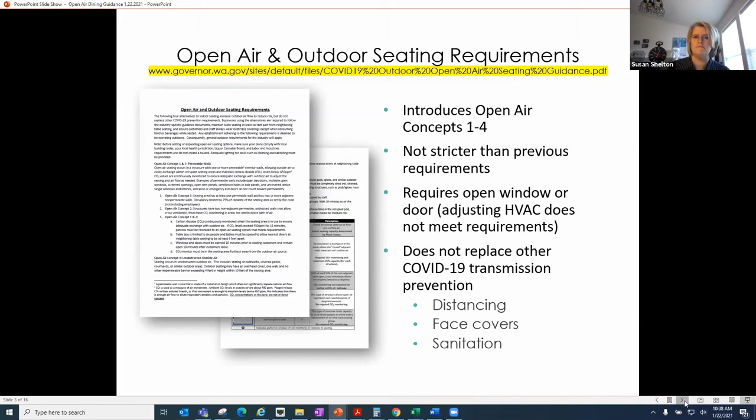So let's cover real quickly page 1. It's got quite a bit of narrative. It explains some of the introduction, talks about what the permeable walls are, the different open air concepts. And I'd like to highlight a few items in particular. In the first couple of paragraphs, it talks about how to work with your local building codes, your local health jurisdiction, Liquor Cannabis Board, Labor and Industries, your other partners.

So again, we really want to encourage you to review these guidance materials or the requirements very carefully, see how it does apply to your structure. And then if you have questions or if you need to make a modification, really reach out to your local partners. They can also assist to help you see if you can fit these requirements.

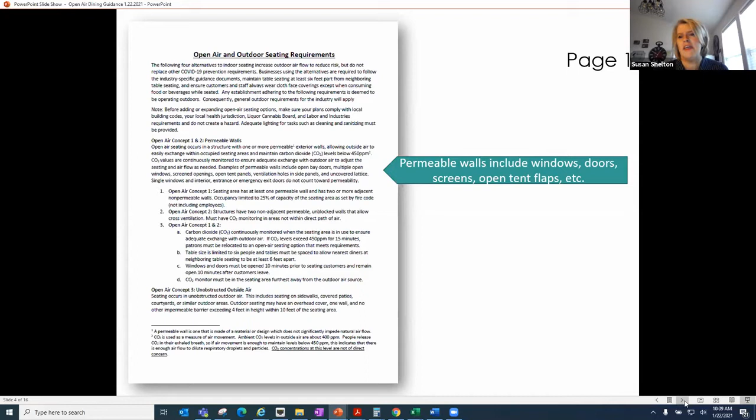The permeable walls we'll talk about, but a permeable wall is going to be a wall that can be opened with either a window, a door, a screen, open tent flap. It's going to be an actual opening inside the structure perimeter. All right, so again, people have been asking quite a bit about, can I just modify my HVAC? And the answer is no, you actually have to have an openable window, door, screen, something along those lines.

Also, one thing we'll be talking about quite a bit today: in open air concepts 1 and 2, we actually do require some carbon dioxide monitoring. So we'll be talking about that quite a bit as well, because we're getting questions on the CO2 monitoring. Also, open air concepts 1 and 2 require you to open doors and windows 10 minutes before and after your customers leave. So you have to open it 10 minutes before they arrive, and then 10 minutes after. You have to make sure that your facility continues to air out.

And when we talk with people and they're starting to do some of the monitoring, they do see a difference. So when your area has been closed up overnight, you don't have maybe the HVAC fully going, you don't have staff in there, it still will have some levels of carbon dioxide. So we want to make sure you open up all of those areas as much as possible before you actually have your customers come inside. And again, it's also very key once they leave that you continue to let the facility air out to remove as much of the carbon dioxide as possible.

So let's talk about why we're looking at carbon dioxide. Sometimes people are confusing it with carbon monoxide. So we wanted to clarify the differences between the two real quickly. These are compounds that we have in our environment. We wanted to cover just a few basics.

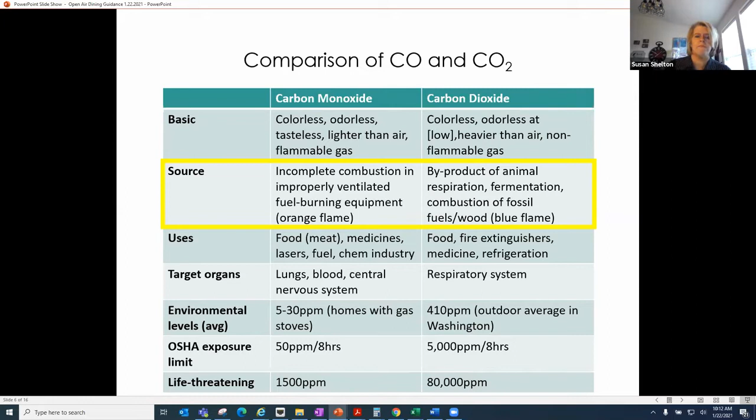So we're not trying to totally scare you about these products. Carbon monoxide does have some usage. If you're working in food service and you know you have some of your meats that come in modified atmosphere packed, so they're sealed, sometimes they will seal that with carbon monoxide. It'll bond to the blood, actually the heme inside of meat, and it will keep it red. All right, so there are some times that we use carbon monoxide in food.

It's used in medicines, lasers, fuel, chemical industry. Similarly, we use carbon dioxide in food. We also use it in fire extinguishing, medicines, refrigeration. So we have quite a few uses for each of these products.

Carbon monoxide generally targets a wide spectrum of your body if you're exposed to it. It goes for the lungs, your blood. It can bind into your blood, which is why it can be quite life-threatening. It also goes for your central nervous system, compared to carbon dioxide, where the primary target organ is going to be your respiratory system. So carbon monoxide isn't generally something that is naturally present; it's more of a sign of something that we've done with our environment, something we're producing.

But we will have average levels, and these numbers are from the Department of Ecology. In homes with gas stoves, low levels are about 5 parts per million. High levels, when gas stoves aren't functioning properly, are going to be closer to 30 parts per million. Compare that to carbon dioxide. Ecology estimates about 410 parts per million for the outdoor average throughout the state of Washington. Again, that's an average. We'll have some places that are higher and some places that are lower.

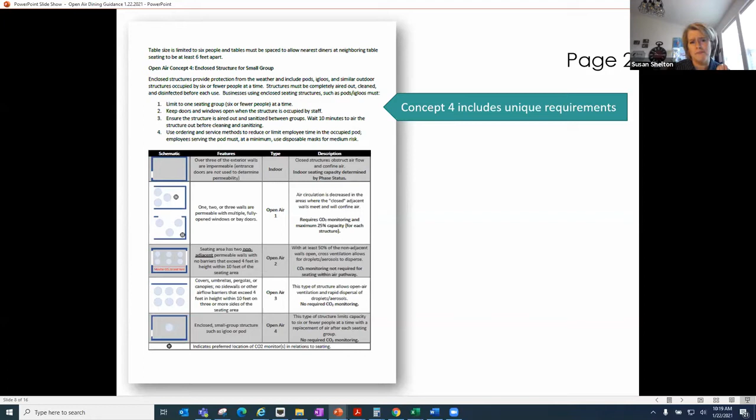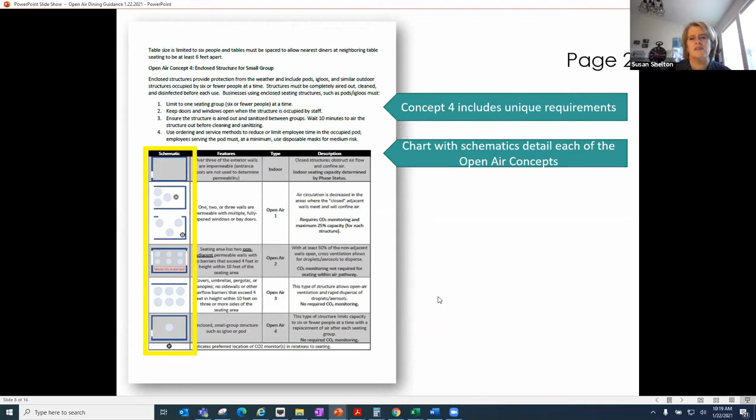So probably the best concept of this document, and I think the most helpful, is the chart down on the bottom of page 2. It's a chart with the schematics detailing each of the open air concepts. So it has a small little map there to help you visualize the space. And then it has additional materials and concepts about features, the type, whether it's indoor or open air, and a description of what else is going to be required for that space. So again, I think the chart on the bottom of page 2 is going to be very helpful.

As we go through this, you'll see the schematics have some pretty consistent functions. So you'll see that there's a blue line that goes around. That's what we call a non-permeable wall. So that's going to be a wall that does not have a window that can open. That might be a sheet of glass. It could be a brick wall. It doesn't have a door inside of it. So it's going to be what we call a non-permeable wall.

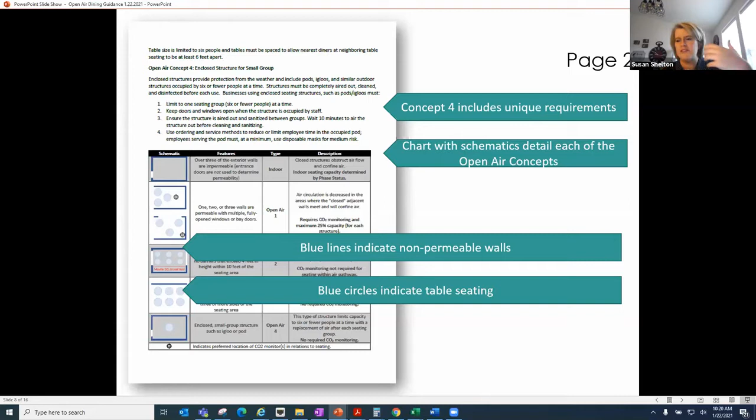You'll also see blue circles. I really want to emphasize this concept that you're still going to be held to having no more than 6 diners at each table. And these table seatings still need to be at least 6 feet apart. So what you'll see is some locations, these are just generalized locations, where sometimes we're also going to have the 25% capacity. And so in this image that we're showing right now with the arrow pointing to it, you'll see that this has full capacity. Whereas when you look at open air concept 1, you'll see that there are fewer tables sitting around that space. So again, we're really trying to indicate that you also have to sometimes watch your capacity inside the facility as well.

And then the target icon. So on a few of them, you will see a target icon, and that indicates that there needs to be carbon dioxide monitoring and a generalized location for where to put the meter.

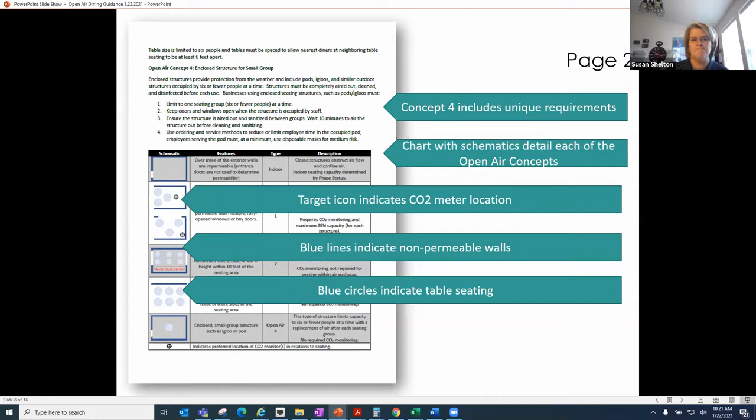So I want to cover indoor quickly. Indoor indicates that they have probably at least 3 exterior walls that are impermeable. You don't have a window that you can open or additional doors. And so this is going to be what we would consider indoor dining. It's going to be prohibited in current phase 1. It won't be opened again until phase 2. So again, this is going to be indicated as having no permeable walls, except you might have 1 access door that goes to the exterior.

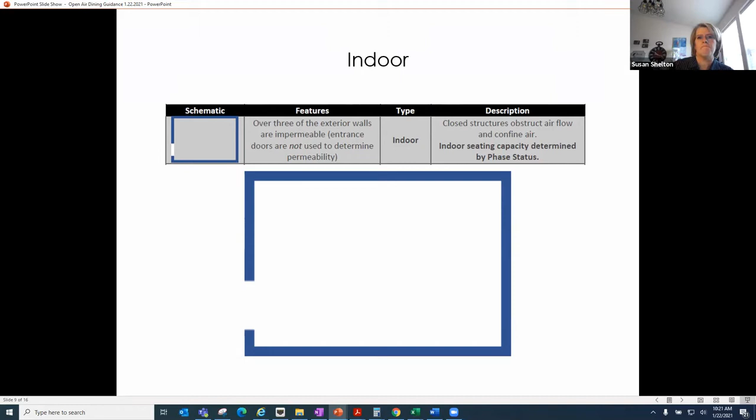Here's an example. Again, these are plate glass windows. They aren't operable, so this one would not be able to be used under the current guidance for open air concepts. All right, this is indoor dining. It would be closed until phase 2. Good for takeout, good for delivery, other options, but not for open air dining at this point.

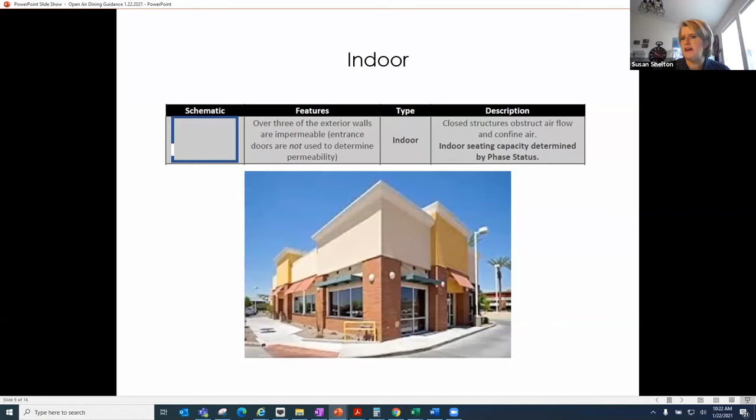So let's talk about open air concept 1. This is probably going to affect the widest variety of operators. So these would indicate that we have 1, 2, or 3 walls that are permeable. All right, so you have multiple fully open doors, windows, bay windows, bay doors. You have some sort of conglomeration of multiple openings that can allow outdoor air into the facility. With this one, though, the air circulation is decreased; you don't necessarily have cross ventilation where you have opposing walls that are completely open.

With open air concept 1, you would need to use the carbon dioxide monitoring. And again, with this one, you would have the maximum capacity of 25%. I want to be clear on that too. It's per structure. We've had some questions about that. If you have 2 tents outside, or two rooms that could fit this, it's 25% per room, not 25% total for that entire facility.

So that's the introduction to open air concept 1. So let's look at a couple of pictures. So on the left panel, you'll see there's a room that's pretty much got one side that they can open up. It's got a bifold kind of accordion window system that they can open wide. Because it doesn't have the cross ventilation, this would need CO2 monitoring and again would be considered open air concept 1. Now the facility on the right is also going to be open air concept 1.

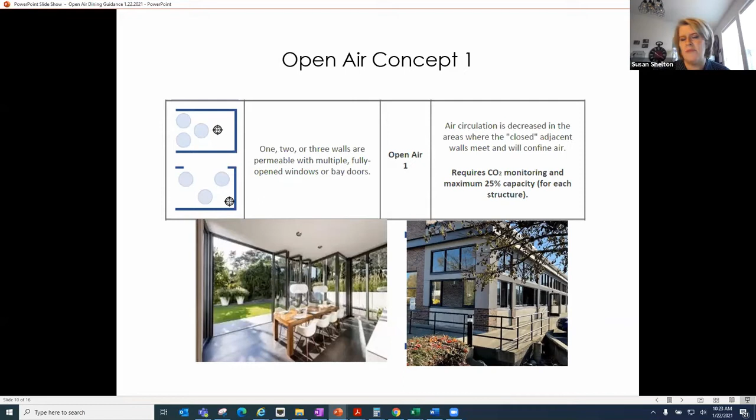And this one might be a little bit more difficult to see, but if you look closely, you can tell that several of the windows along the side are actually open and able to be kept open. So let's look at that facility a little bit more on the right. So here's the indoor shot of that facility. So again, this would be considered open air concept 1. It doesn't have cross ventilation because we don't have similar windows on each side, so they're not on opposing sides. So this one would require carbon dioxide monitoring to make sure that the levels were staying below 450 parts per million.

Here's another example. So this one might be difficult to be able to tell, but the windows that are along the left that face out to the water actually are open. Those do not have panes of glass. So that is actually open space. It's pretty protected. In general, it does have an overhead cover. It's got carpeting. You could tell it's pretty resistant to water inside there. So it is an enclosed space. But because it has at least one side of openable windows, then that would be considered open air concept 1. So again, because it doesn't have the cross ventilation, this would also need the carbon dioxide monitoring.

Here's another classic example. It's a facility that has bay doors. Again, they have a couple of bay doors that they can open. They also have the entry and exit door that they can also use. In this case, it's the bay doors that give them the ability to do open air concept 1. So they would need to open those, and because it doesn't have cross ventilation, they would still need to monitor the carbon dioxide inside the facility.

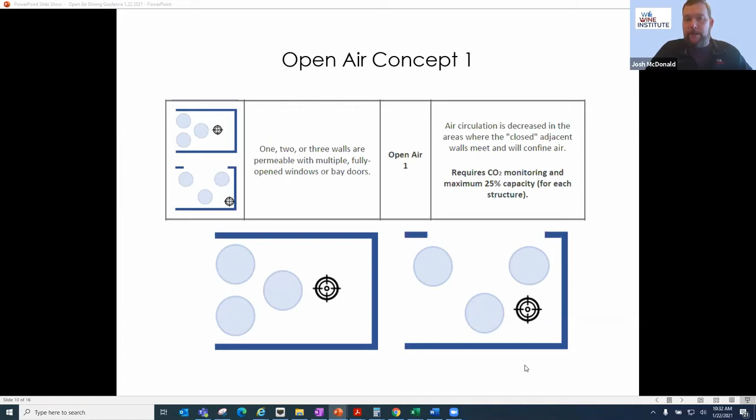I can talk about it on the Liquor and Cannabis side. So the process is you go to our website, you go to the licensing services, and then you go to the alterations application, and that application will give you instructions on what you need to fill out and send in to us. You can email it to us. Our turnaround time, our guys have been incredible about getting these done pretty darn quickly.

I want to stress that if these are indoor areas that you have already had approval to operate in, that you just haven't utilized since you haven't been able to with the pandemic, you do not need approval from us for that. Those are already your dining rooms. And if you meet those requirements and can open, you can go ahead and utilize those. Please do not do an alterations request for those because it's not needed.

You only reach out to us for approval if these are outdoor areas that you're constructing, and then fill out those alterations requests, email them into us. Our staff will reach out to you either the same day or in a couple of days, and we can usually get them done in probably 3 to 7 days, unless there's something different about it that we haven't seen before. And then sometimes we need to do a management consensus on those ones. But the process is really easy.

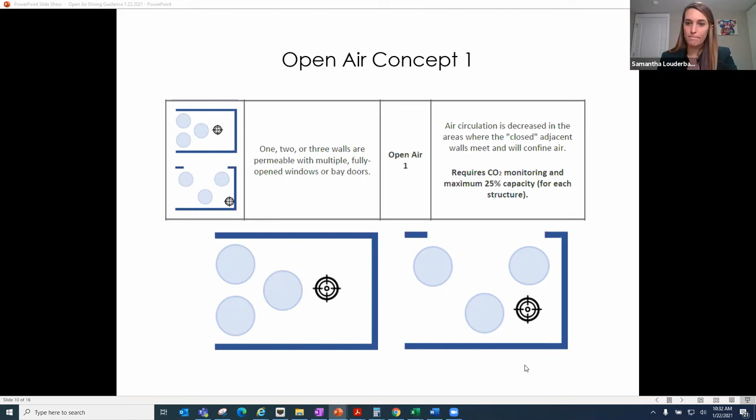Yeah, so I'm going to key back here into open air concept 2. So if you want to have it partially open, that would be open air concept 1, and you need to continue to do the carbon dioxide monitoring. Then you can adjust and say, okay, I have enough airflow for how many people I have in this space. We can appreciate it. We've had a lot of wind in the last couple of weeks that people are like, I can't have this totally open. But at the same time, then you need to monitor for the carbon dioxide.

Now, if you're planning on doing what we call open air concept 2, which is the schematic we have showing here, those need to be fully open because you're not going to be doing the carbon dioxide monitoring. You're expecting full, complete interchange with outdoor air at this point. So those you would have to have open all the way up, because that should be just about as much interchange that you're going to have with outdoor air.

Just one last thing, I think, before we move on to option 2. And again, we can answer more questions at the end of this because I think we'll have more. We're getting a lot of questions around folks reaching out to local health jurisdictions, LCB officers, as well as L&I, and staff not necessarily being up to speed. So I just wanted to address that really quickly and say this came out fast and furious last week. We all saw it when it was finally released in its final version.

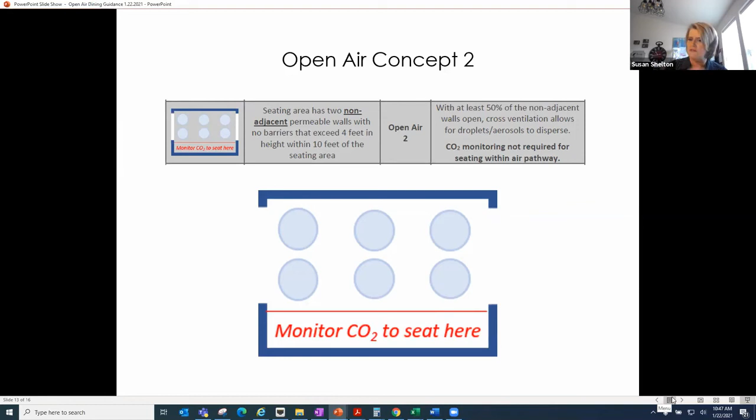So those are my thoughts on open air concept 2. The classic example is an outdoor dining tent. It has open air on both sides. The panels are fully removed so that you actually have as much cross ventilation going in between that unit as you can. That's an example of open air concept 2. And what we see on the screen right here would not need carbon dioxide monitoring.

I released the floor here, Samantha.

I'm trying to answer questions so I'm not missing any for the next ones, but I'm seeing, is there a capacity requirement for open air concept 2? I think this question's come up a lot, so it would be fantastic if we could get that clarified.

That might be something we have to follow back on, because we're trying to make sure that all of our documents, the Department of Health and working with our partners, align with the current governor's requirements and guidelines. We're trying to make sure that all of those are grouped. So I don't know that I have an answer for that one, if anybody else on the panel can contribute to that.

Yeah, I'm with you on that. I think we'd have to follow up. I know we weren't necessarily looking at specific capacity questions, so maybe we can discuss that internally and circle back and provide a response. Yeah, we were so focused on making sure that we were allowing for the open air concepts. I don't want to misspeak and not have it meet the governor's requirements for phase 2 and other phases in particular. So I'll make sure those are aligned. We are working on that though.

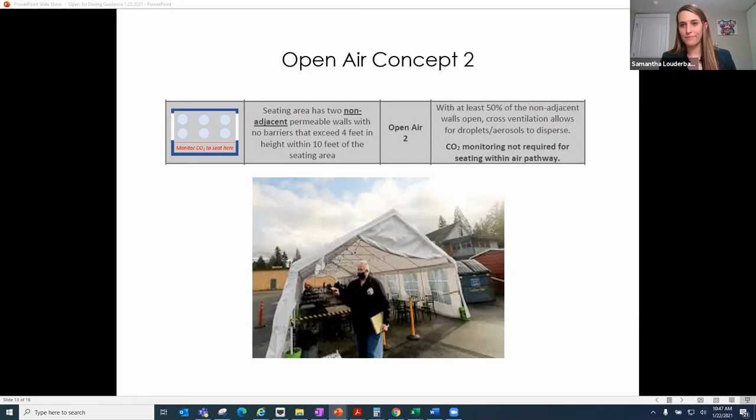Susan, you're muted, unfortunately. She might have froze. She might be frozen. So what was the question again? How many CO2 monitors would you need? Oh, looks like she's back. Oh, I apologize for that. I'm not sure what happened. It just all of a sudden blinked. So I apologize. So Ryan, did you want to complete that answer?

Sure. From my understanding, what we're looking at is just that you have a monitor, and depending on how many spots you might need to check, one monitor should suffice. I don't think we're looking at creating an 8-hour average. We just want you to periodically check areas where we require the monitoring to make sure that it's at the level that it needs to be, and that whatever is happening inside the location, number of people and activities or whatever's going on, that it's not elevating up to a level above that.

So checking early in the shift, checking when we are the most full, max whatever capacity is going to end up being, to make sure that the levels are holding steady, to understand how many people you can have in the space, because every space is going to be different and have its own dynamics. Some people may be able to have 10 or 15 people, and some people may be able to have more than that. And it's just a matter of one monitor should be fine to check those areas periodically throughout the day.

I think the other part of that, a lot of you might have one attached to your HVAC where it helps you modify how much outdoor air you're pulling in on a regular basis. We're not talking about that one. It has to be one that's actually dedicated to monitor your dining area and is located in your dining area. And like Ryan said, one works because these are relatively mobile. Most of them have a chargeable battery, so they can be moved around. They don't need to be attached to your wall.

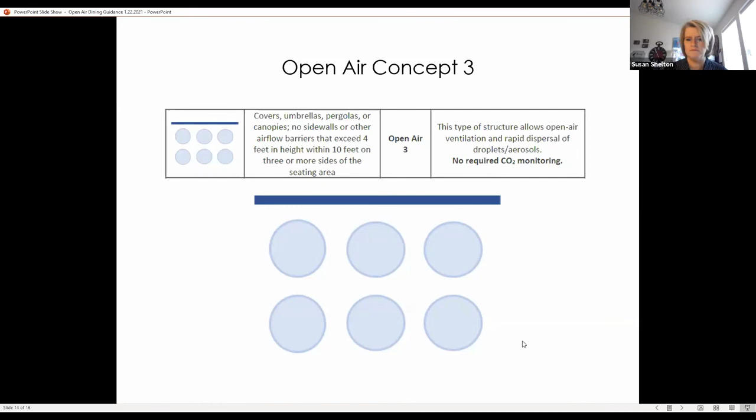Classic example is an overhead cover over a structure that's attached or situated right next to the actual exterior of the facility. So this again would be considered Open Air Concept 3. It has an overhead cover. It has one side wall that does block wind, we recognize, but the other 3 portions of the perimeter actually are not blocked. And so this would allow for sufficient airflow. So again, this was just as a clarification for Open Air Concept 3.

One thing that we do want to make sure that we're all on the same page with, in this image, you'll see a pretty open framework fence around the perimeter. That could also be filled in. It could be brick, it could be wood. It's no taller than 4 feet, so that would not count as a barrier to the airflow. So again, a lot of facilities might have a security wall or some other kind of block that's about 4 feet tall. Again, that would not be considered a block, so that could be considered Open Air Concept 3, up to 4 feet.

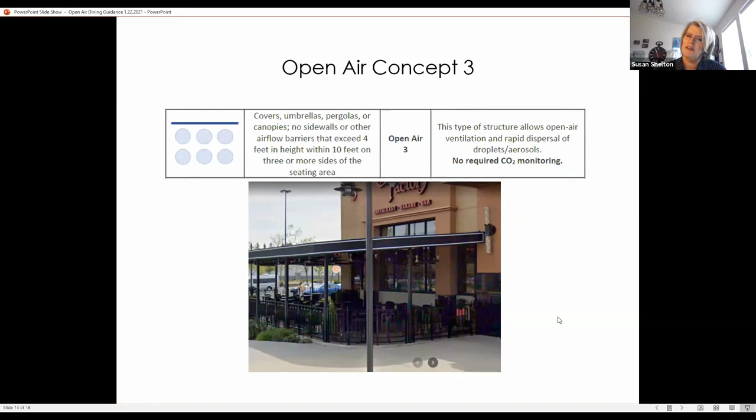Any questions or additional thoughts from panelists on Open Air Concept 3? Okay, our final Open Air concept is Open Air Concept 4. And again, these are the small group structures such as igloos or pods. You'll see on the schematic that there's only one dining table. This is going to be limited to a group of 6 or fewer people at a time. Again, this one doesn't have HVAC inside those structures. They're reliant on having the door or window open.

And so the current guidance allows the door or window to be closed when the dining group is in there. But when they are ready to leave, then the pod needs to be opened up as much as possible, aired out for at least 10 minutes, and then the staff can go in and clean and sanitize. Again, the key for us on this one is because there isn't HVAC inside these structures, we are encouraging that staff don't go in when they're actually occupied. So, figuring out a different way to do your menu ordering or to do your delivery of the food, as much as possible to limit staff time inside of that structure.

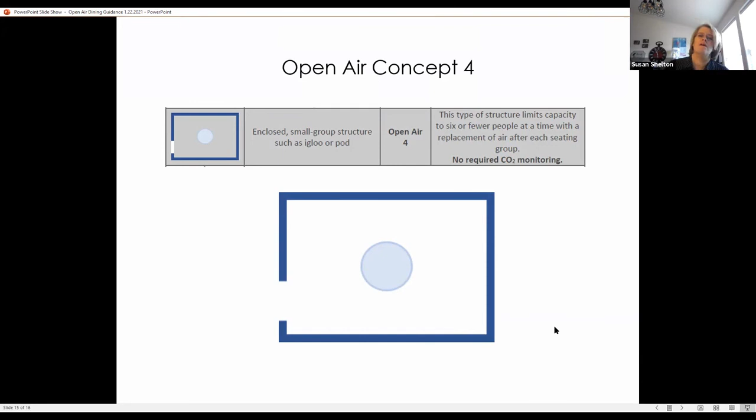When they do service these units, they are supposed to be wearing a disposable mask, something that fits for medium risk of transmission. So again, that's usually a disposable mask. And again, this one doesn't require CO2 monitoring. So classic examples are the igloo shapes, the smaller yurts that you might see out and about. And again, these are smaller parties up to 6 people.

And that wraps up concepts 1 through 4. For everybody, I want to emphasize for open air concept 4, we tried our best to not really change much of those from the previous guidance. I know some wineries were using these igloos, and others, very successfully. So it's very important to make sure that if your current setup was approved, really nothing changed, and you can continue as long as you continue to follow the guidelines.

So I want to emphasize that this one was one of those concepts that was, at least in our industry, more prevalent and being approved before the new guidance came out. And I know we worked together as state agencies and industry to make sure we didn't go backwards on any of those. They should look about the same.

One of the changes that was made to this, based on industry and stakeholder input, was the ability for diners to close that window or door when they were in it. We recognize it was a little tough in the winter to be inside these areas. And so because it's a household group or a group that already has contact, this current version allows for that door or window to be closed while the diners are in there. But again, it needs to be open when an employee needs to go in and service the pod. But yes, the rest of it is the same, other than it allows up to 6 people.